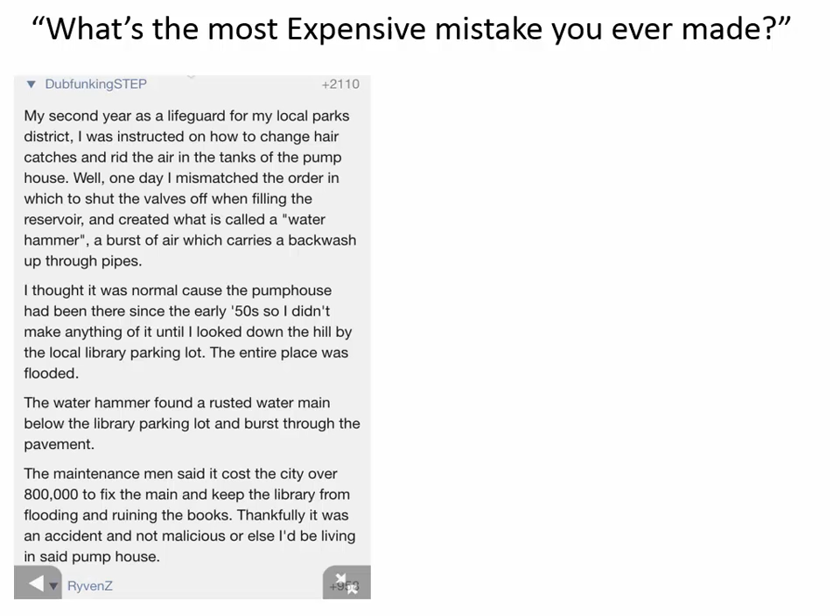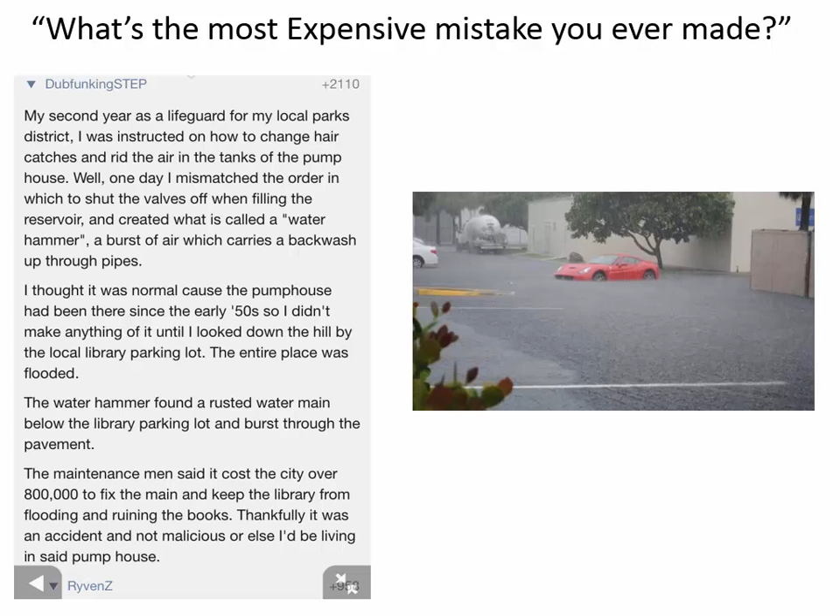So here's a picture of a really nice car that's flooded, just to drive home the point that water hammer can be expensive. Now, it's not always this enormous catastrophic loss. Sometimes water hammer can just be an annoying thing in people's house that they sort of scratch their head and wonder about what's going on. And that's what's going to be illustrated in these videos where water hammer is being observed in the home environment. So let's take a look at those, and then we'll move into the calculations that explain what water hammer is and how we can avoid it.

Almost seems like his pipes are haunted, right? What is all that banging? You notice it's as he was closing the valve that the trouble began. Let's take a look at another one.

It's a familiar sound. Nearly everyone has heard it in their own home when someone slams a faucet closed.

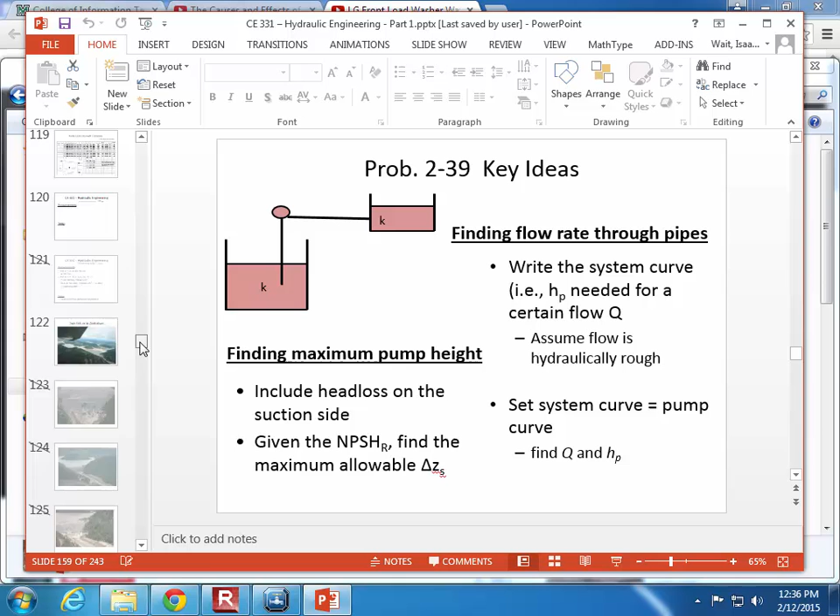Problem. I think it started the next one. All right. And it crashed PowerPoint in the process. All right, we need this one.

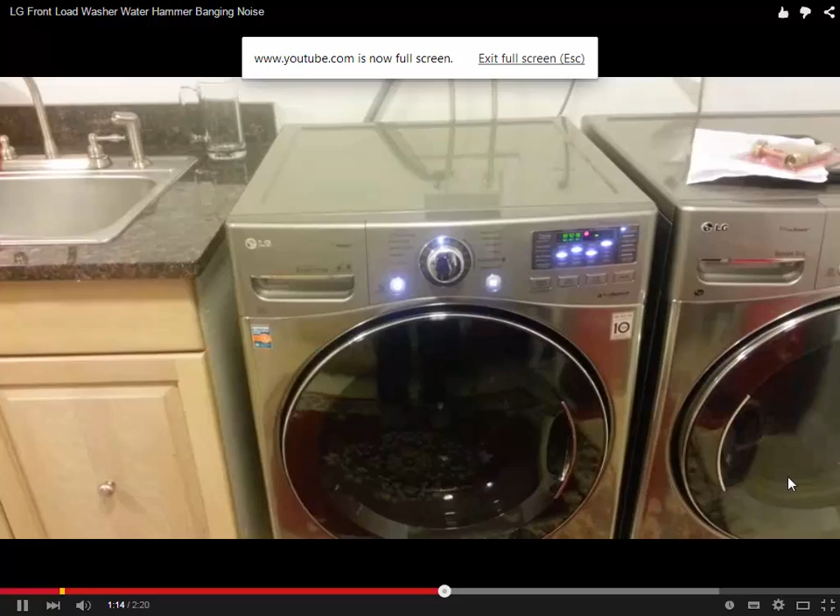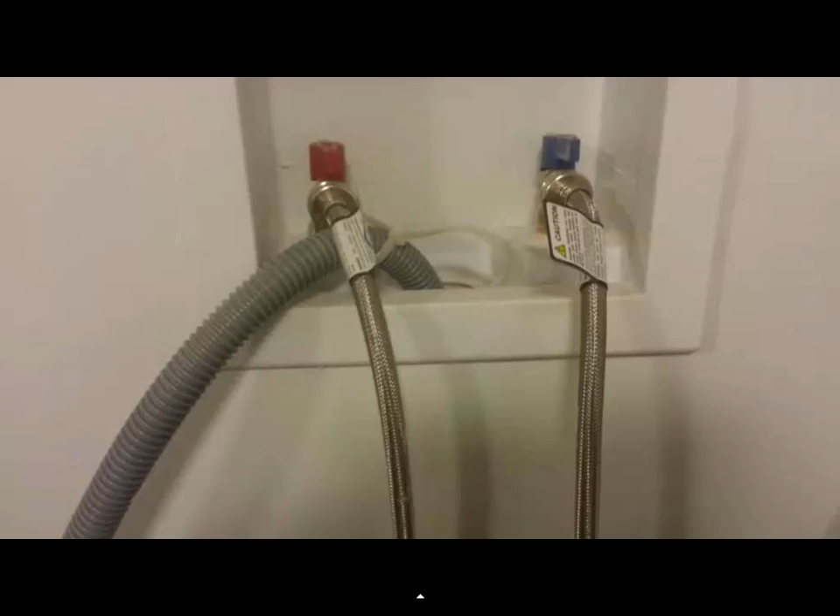Okay, watch the washing machine. Well, okay, you heard that noise come from the pipe. When we get closer, we're going to see the action over here. You see the whole pipe shake. That's from the cold water valve. And there's one solution to take care of this problem. Actually, you have two. You either lower down your house water pressure, or you have to get yourself one of this guy called mini water arrester.

All right, we'll talk about what that device does, but what you saw in the video is that something about the washing machine is causing the pipe to shake, and that's not so bad if it's a flexible pipe like is connected to the wall, but inside the wall where the pipes are fastened to the wall, over time that vibration can sort of shake the pipes loose off of the supports, and then the banging gets even louder. So what was happening in the washing machine is that there's a valve inside the washing machine that opens and closes very quickly, most likely a ball valve.

And we looked at valves in a previous class lecture, and we saw that a gate valve opens up very slowly. By contrast, a ball valve is just a sphere that has a hole through it. And when you turn it one direction, suddenly there's a path for the water to flow through.

So in the case of this washing machine, it has a valve that's opening very quickly so that a little bit of additional water can go into the wash, and then it's closing very quickly. And in fact, it's closing so quickly that a surge of pressure is sweeping through the pipes.

So let's step our way through the physical process that causes water hammer. And the easiest way to explain it is to envision a very large reservoir that is connected by a pipe, and at one end of the pipe is a valve. Pretty common to control the flow rate. So water is going at a steady state through the pipe towards the valve.

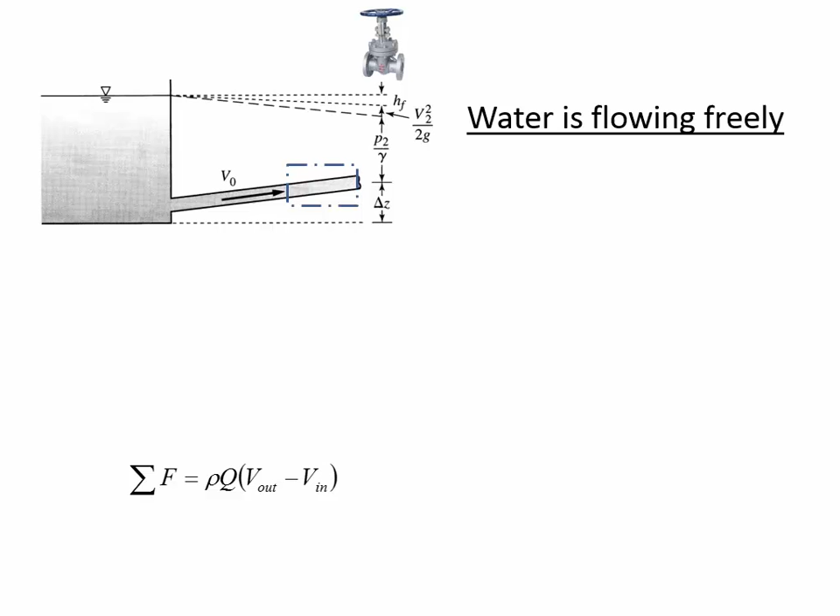So it's constant? Well, that's a good question. Actually, celerity depends on the environment that the shock wave is in. Just in free and open water, celerity is constant, assuming constant density. But when we confine water in a pipeline, then we have to calculate a modified celerity. And we'll do that in an example where we have a certain pipe that water is flowing through, and so the celerity changes because of that. That's a good question. Are there any other questions before we move on?

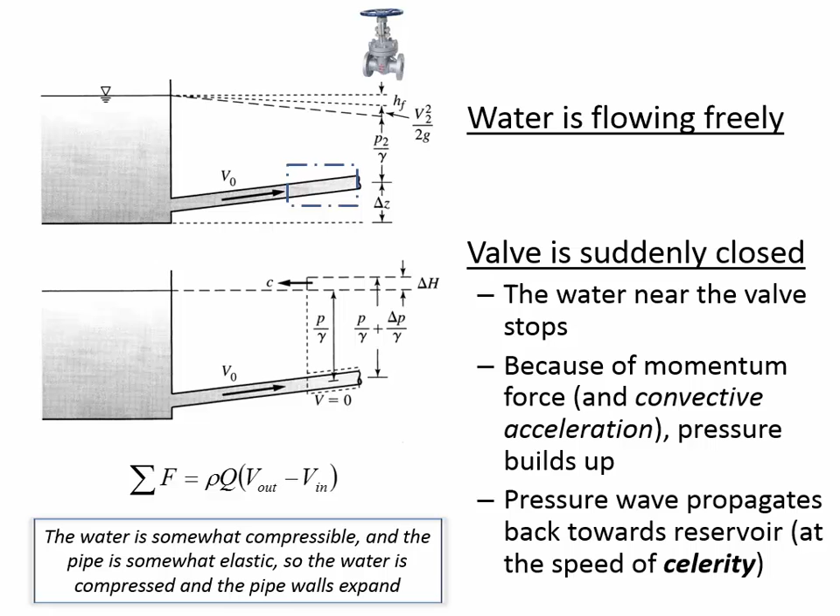Here in the box, I've reminded you that the compressibility of water is very low. It takes a lot of pressure to compress water, but in the case of a water hammer, we achieve so much pressure that the water is compressed a little bit and the pipe walls expand.

So now in this snapshot, the pressure wave has made its way all the way to the reservoir. And we're in a temporary equilibrium right now, actually. The pressure wave got to the reservoir, and at this instant in time, the pipe has expanded. So you see this little dashed line. That's representing the fact that the pipe is expanded just a little, not really a lot, but enough that there's more water inside the pipe than there used to be when the pipe wasn't expanded.

Think about if the pipe sort of swells just a bit, then it's going to have more volume that it can store. More water is going to be found in the pipe than when its diameter was a little bit smaller. And so actually the liquid height of the reservoir can decrease a little bit when the pipe is swelling. The water level goes down just ever so slightly on account of the additional volume that's stored inside the pipe.

And the pipe actually has a lot of energy in it because it's got potential energy of that pipe that has expanded. It's going to contract again. It's just a temporary thing that it's expanded because it has so much energy inside the pipe. That water is going to flow back towards the reservoir because it's expanded.

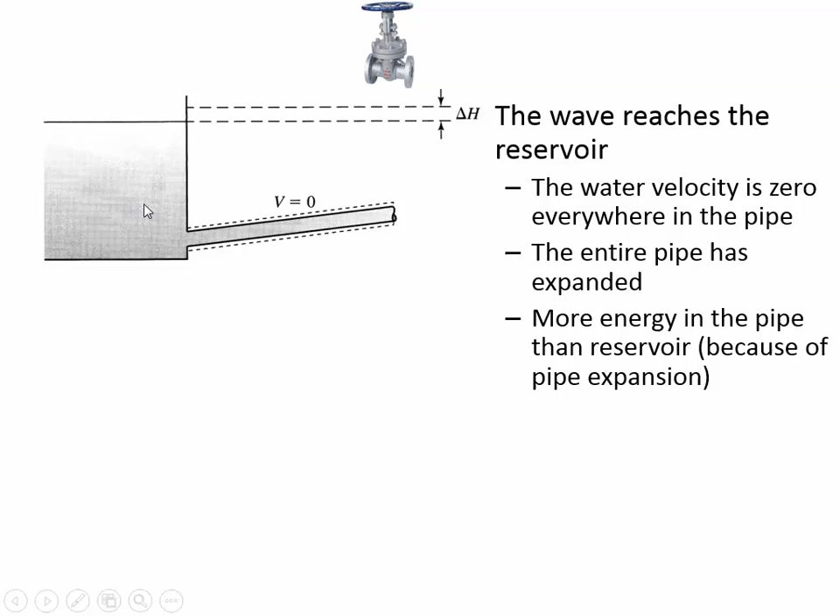And so now that's what's depicted here, is that the water that temporarily had flowed into the swelling pipe is now going back into the reservoir, and we have the shock wave returning back towards where the valve is. In our first stages, the shock wave was going towards the reservoir, and now it's making the return trip back towards the valve. So this wave can move back and forth between the valve and the reservoir several times before the energy dissipates enough that the water hammer is finished.

So any questions about why there's this banging that we hear? The frequency of the banging when the guy was closing his valve, that actually means something. There's a speed that the water is traveling, and how quickly you hear the banging indicates how far the shock wave is traveling before it finally reflects off something and is coming back.

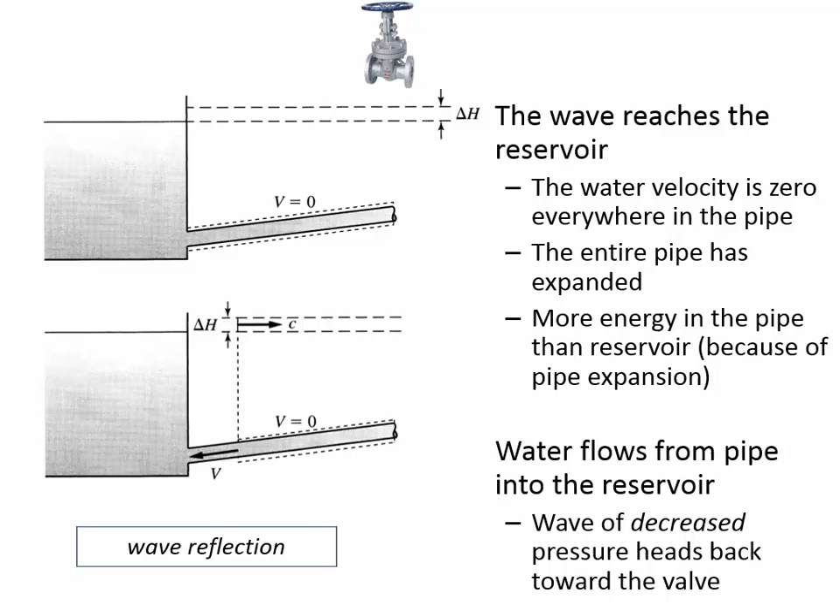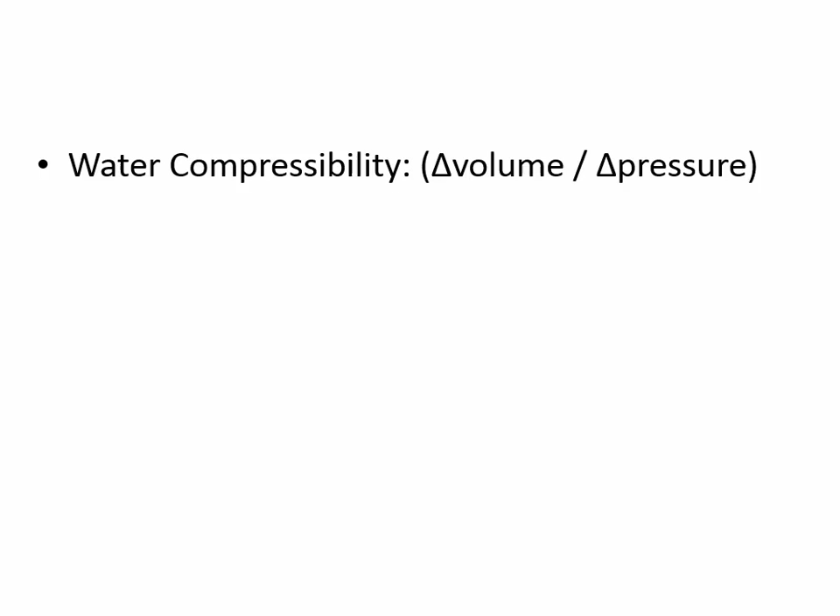So it's all about wave reflection. And water compressibility is an important part of calculating water hammer. And you know, we've talked before that it really takes a lot of pressure to compress water. And here is an illustration of that effect that I took from the website of London South Bank University. And it shows the temperature dependence of water compressibility.

And you'll notice the units here are inverse gigapascals. And the reason for that is it is a unit change in volume. So that would mean how many liters are compressed out of a certain volume originally, also measured in liters. And so the change in volume is unitless because it's a change in volume divided by the original volume, divided by pressure. And so what we're left with is these units of inverse pressure.

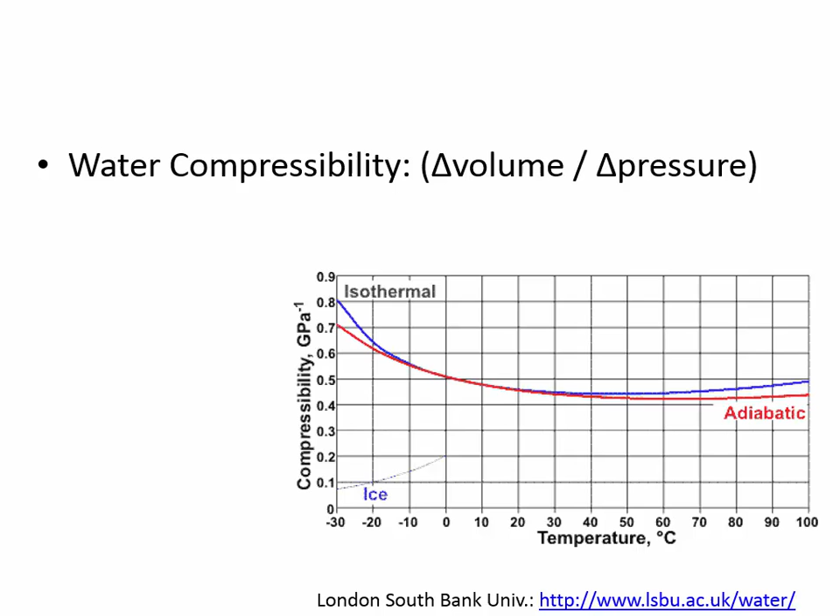And gigapascals is way, way far beyond the water pressures that we're usually working in. In a typical municipal environment, remember, 500 kilopascals would sort of be like a baseline water pressure for inside your house, 500 kPa. And so beyond that is MPa, megapascals, and then 1,000 times beyond that is gigapascals. So it really takes a high pressure in order to change the volume of water.

And when you do apply that pressure, why is it changing volume? It actually has to do a little bit with not the molecule itself, but the association that the molecule has with adjacent water molecules. And so it comes into these sort of associations with adjacent water molecules that very slightly have different volume requirements. And these different diagrams give you an idea of some of the different shapes and arrangements that water can take on as it's being compressed.

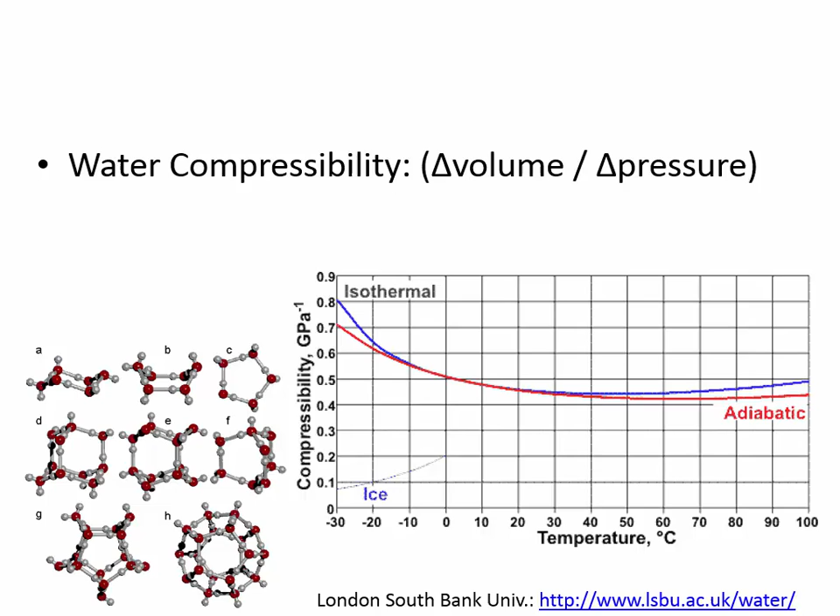So this was compressibility. The inverse of compressibility is actually what we'll put into our equations. So sometimes compressibility makes more sense to students because we're thinking about change in volume relative to how much pressure is applied. But it's actually the bulk modulus of elasticity that goes into our formulas for celerity and the amount of the pressure that accumulates. And bulk modulus of elasticity, you'll see, has, instead of volume divided by pressure, pressure divided by a unit change in volume. All right?

So it has a negative sign here, which tells us that an increase in pressure is going to decrease the volume that is occupied by a certain amount of water. So that's why we have a negative value for the formula for bulk modulus of elasticity. And you may remember bulk modulus from your materials classes, because it's a physical property that can be applied to solids as well as liquids like water.

Here's a table that's taken from the text. It shows that the bulk modulus changes according to the pressure of the environment that the water is in, but also according to temperature. And so when we do problems like this, if we really want a high degree of precision, we have to specify what's the original pressure that the water is experiencing when the water hammer begins, and then also know the temperature, whether it's room temperature or something else. So here's the bulk modulus in SI units, and here they are in traditional units.

Of course, traditional units are always a little tricky, and even more so when we're going to be working in examples with water hammer, because we have the bulk modulus given in terms of pounds per square inch. But when we do our calculations, we're going to need to remember to change pounds per square inch into pounds per square foot. So what's the conversion from pounds per square inch to pounds per square foot?

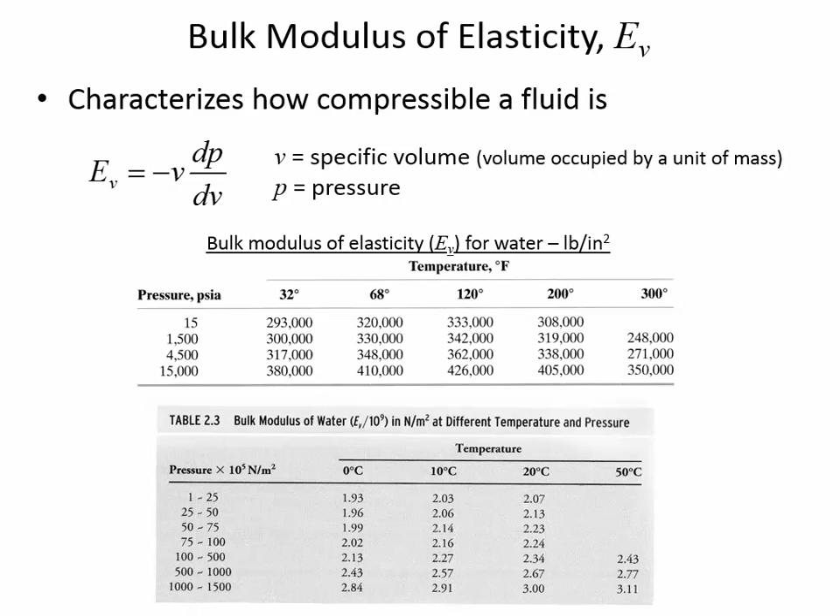144, yeah, because there's 12 inches in a foot, and it's 12 inches on each side. So if we have 1 pound per square inch, then that would be 144 pounds per square foot. So just as a hint, when we get to the example, we'll work the example in traditional units, and you'll need to remember that conversion factor.

All right, so we talked about celerity, and it's not celery, but every time I say celerity, I think of celery. It means basically the velocity of a pressure wave. And theoretically, out in the open water, we can calculate how quickly that pressure wave is moving just by considering the bulk modulus of elasticity and the density of the liquid.

All right, so bulk modulus, of course, depends on the pressure and the temperature. And the density of the water also depends on the temperature of the liquid. But a typical open environment celerity would be 4720 feet per second. So it's really moving quickly, much faster than a shock wave moves through air.

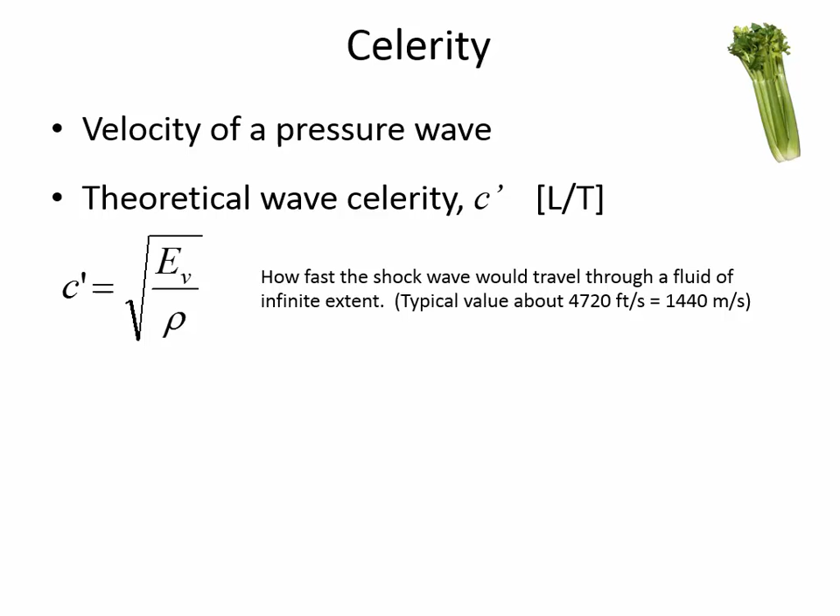But in a confined pipe, we have a different equation for the speed that a shock wave moves through water. And it accounts for the diameter of the pipe, and the diameter is the inside diameter that we're talking about, because we know a pipe has thickness, and the pipe thickness is accounted for here. The thicker the pipe is, obviously, the less it's going to flex. And so we have to remember that it was the pipe expanding a little bit that caused an accumulation of energy inside of the pipe.

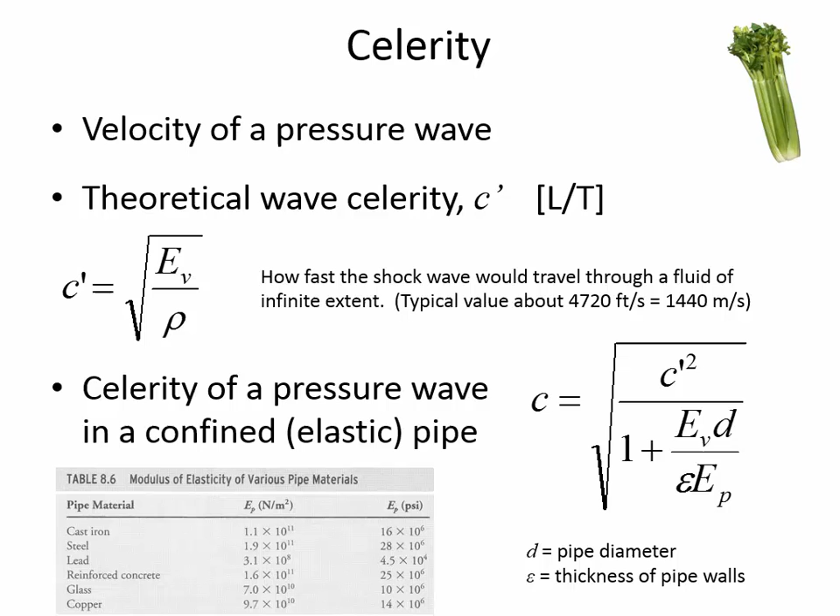And so we have to know, how is the pipe going to behave when there's a pressure accumulation inside of it? And so the pipe's behavior is described by its thickness and then the bulk modulus of the material itself. The bulk modulus of the material says, how well is this particular pipe going to expand when there's an increase in pressure? So here the celerity in the confined pipe takes the water characteristics and the pipe characteristics into account. And that's how we find how quickly the shock wave is moving through the pipe.

And so if we know the speed that shock wave is moving through the pipe, and we know the pipe's length, then we can find the travel time for some pipe length. Now, this formula that I've given you, though, is just the travel time. It's a one-way travel time. It's going to turn out that operationally, what we need to make sure of is close the valve slow enough that the shock wave can go from the valve to the reservoir and back before the valve is closed. That's what we can do to prevent the library from flooding and an $800,000 repair to the city's water main.

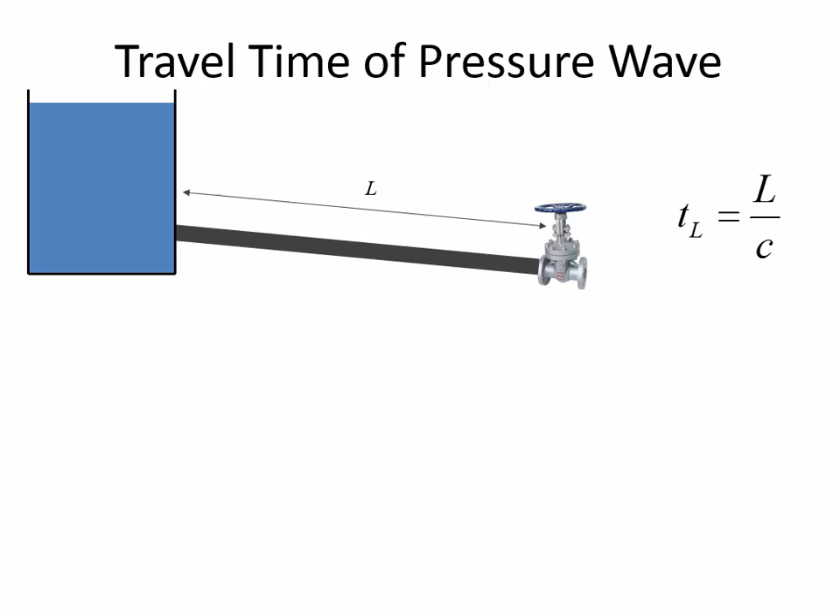We have to make sure that we close the pipe nice and slow, because if you close the pipe slow, the pressure doesn't accumulate, because the deceleration is so slow that there's not a pressure accumulation. So that's really the key to all of this, is rather than just snapping that faucet closed really quickly, you close it slowly and the pipes aren't going to vibrate. So the travel time that we have to consider is the round-trip travel time.

And once we know the velocity that the water is traveling initially and the speed that it's traveling, you can actually find out how much the pressure is going to increase during the peak of that surge. And here's the formula for that. Now, as I've mentioned, the worst case scenario, you're going to get the most pressure accumulation and the worst water hammer if you close the valve so quickly that it's totally closed before the shock wave makes it to the reservoir and back. So that's the worst case scenario, and that's what's going to give you the maximum pressure increase. And if you close the valve slower than the travel time takes to go there and back, then you won't see that delta P. You'll get a pressure less than that delta P.

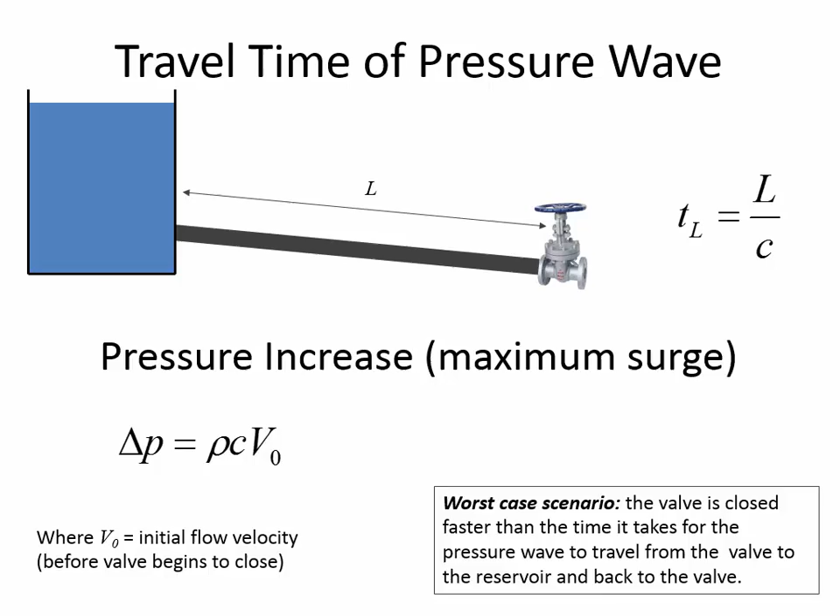All right, so here's the example where you're going to get a chance to try these equations out. We have a system that's described here, a 2,000-foot long pipe. The 4-inch steel pipe that we're talking about here, that's the inside diameter. And so that's what you can use to get the cross-sectional area. And you're going to need the cross-sectional area to calculate the initial flow velocity. Here we've got the characteristics of the pipe, the thickness of it, and the bulk modulus of the pipe material, since this is based on steel.

Here's the flow rate, 0.6 cubic feet per second, and then here are the water characteristics. We have the bulk modulus of the water and the density of the water. And in traditional units, the density is a bit weird, 1.94 slugs per cubic foot. And I remind you down here at the bottom that if you have one slug being accelerated 1 foot per second squared, then it takes 1 pound of force to do that. So you'll need this conversion factor at the very end. So I'd like you to go through these equations and first of all, calculate the pressure increase if the valve is closed instantaneously.

And by instantaneously, what we really mean is it's closed so quickly that the pressure wave, it's closed by the time the pressure wave makes it back on its round trip. And then after you've found that pressure increase, let's try and avoid the water hammer from occurring and calculate the minimum amount of time that should be taken to close the valve.

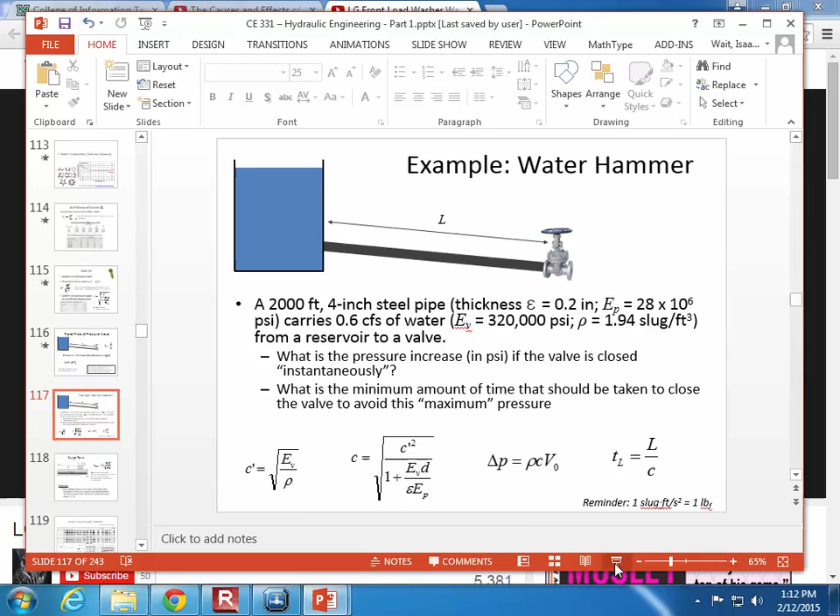I didn't necessarily need to make it my first calculation, but I found the initial flow velocity at the beginning just because I knew later on I was going to require it. So we've got the flow rate divided by the area to get the initial velocity. And you know, 6.87 feet per second, that's a typical speed of water flowing through an underground pipe network. That's not unusually high.

And 2,000 feet isn't an unusually long stretch of pipe. Throughout the area here, there are water tanks all over in the hills pressurizing water in different neighborhoods, and it would be very common for there to be 2,000 feet from a tank to a customer. So we're not dealing with really crazy values here. This is a pretty accurate example.

So we can find the velocity of the pressure wave moving through open water for the temperature conditions that we're describing. Using this bulk modulus, 4874 feet per second. But when we find out how quickly the pressure wave is moving through a pipe, we see that the velocity is reduced slightly.

And that's because as the water is moving through the pipe, it's also causing it to expand. So you could think of it conceptually as it's doing work in two ways. The pressure wave is moving forward, but it's also causing the pipe to expand. And so it's that expansion that slows it down a bit. And that's why we were taking into account the diameter of the pipe and the bulk modulus of the pipe material.

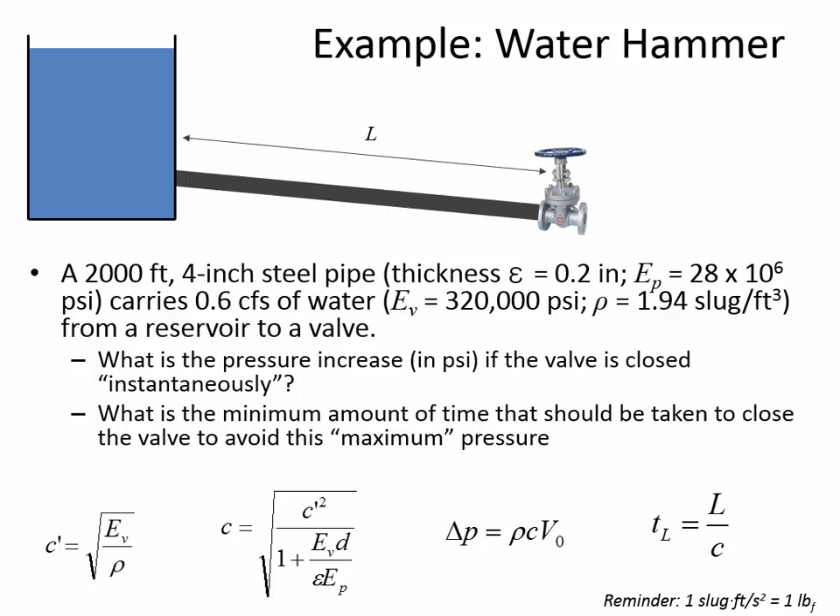So who's going to be paranoid as they turn off the faucet tonight? Try and get the water hammer. Yeah, definitely. Especially if you live in the dorms and it doesn't matter, right?

All right. So, surge tank. This is another one of the options to prevent the damage that can occur. And I'll go through this calculation fairly quickly so that we'll have some time left over to look at the example from last time that we were doing with Excel.

And we can size a surge tank, and you'll do this in the homework. You'll size the surge tank depending on the cross-sectional area of the pipe, the length between the valve and the reservoir, and then it also takes into account the cross-sectional area of the tank. So the bigger the tank you've got, obviously the lower the increase in water depth is going to be.

There's just a certain volume of water that's either going to be trapped in the pipe when the pipe starts to expand, or we can have that volume of water that would have flowed into the pipe during the expansion of the pipe. We'd much rather just have it in the surge tank. So we can either have a tall surge tank or a wide surge tank, but there's just a certain volume of water that has to be accommodated inside of the surge tank.

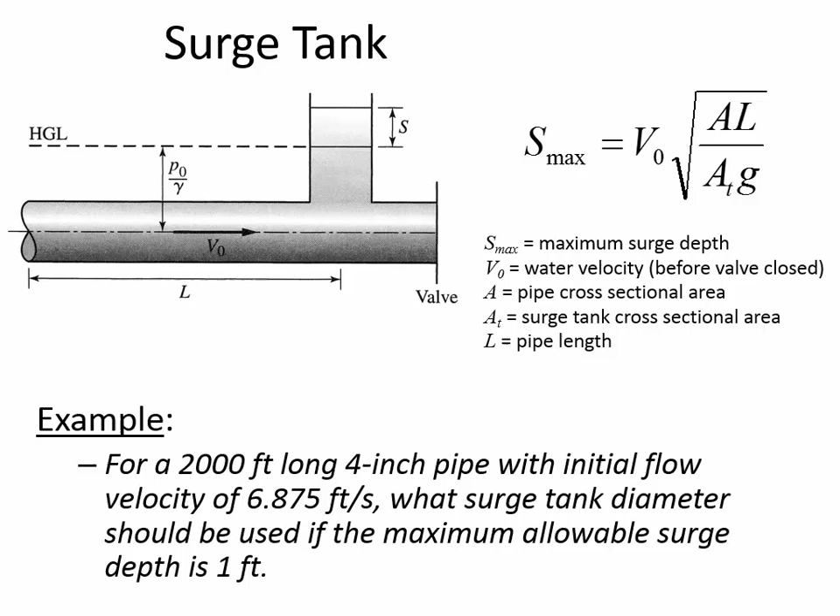All right. Let's revisit this Hardy Cross example that we were working last time. How many of you got a successful spreadsheet that works? Okay, maybe a third of the class. How many of you worked on it, but there's an error somewhere and you don't quite know where yet? All right, and so I guess the balance is people who didn't work on it, right? But you will, because you've got the homework coming up.

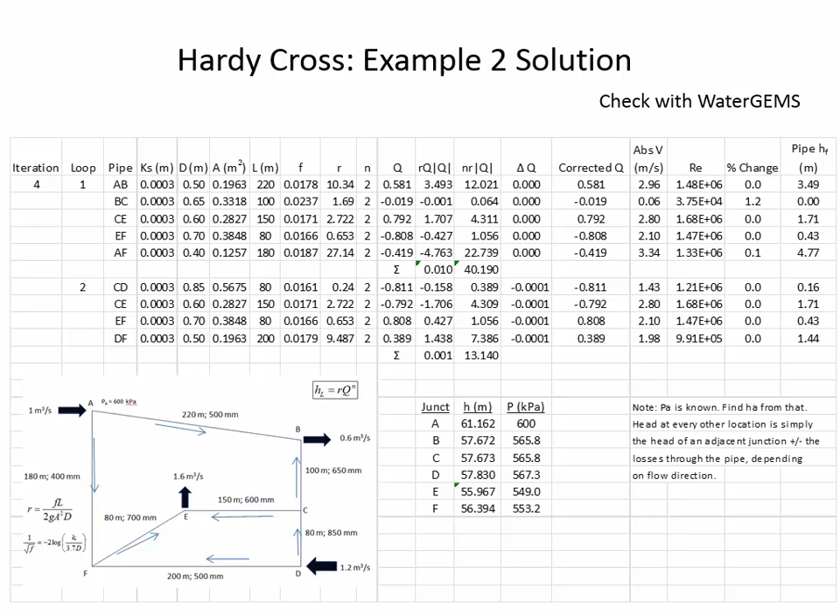All right, you had some exposure to WaterGEMS when we were in fluid mechanics last semester, and you're going to have a lot more this semester. I'll send a reminder email with all of the server details and the school code. So I'll send you the information you need to be able to download the software onto your own laptop.

But what I'd like to do today is just set up this same problem in WaterGEMS and see how well the flow information that we got with our spreadsheet compares to a network that we could put together with WaterGEMS. We've got 15 minutes and I think that'll be plenty of time. So this will be a good refresher of how to use WaterGEMS.

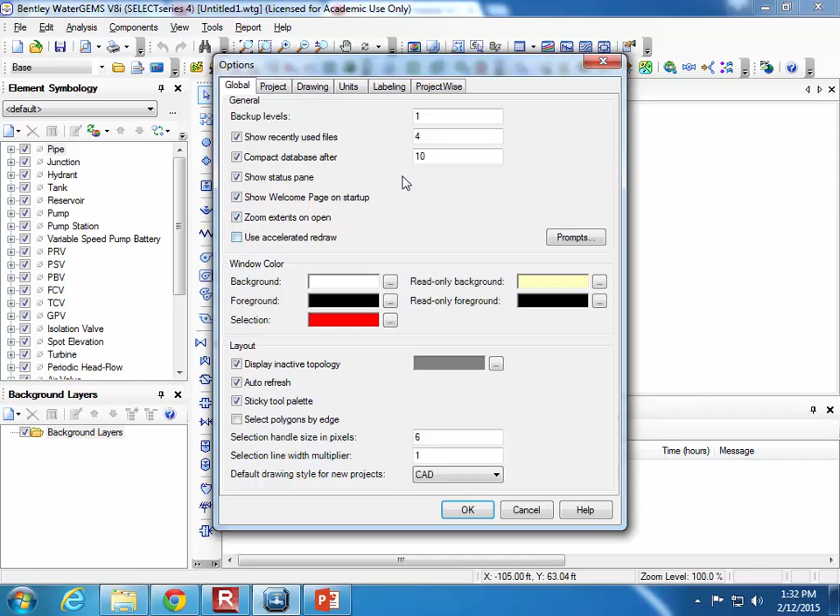We've got to start a new project, and the first thing we're going to want to check is what are the units of the project. We need this to be in SI units because all the given information like the pipe lengths and pipe diameters are in SI. So I go into Tools and check the options to make sure that the units are not in customary but in SI, and click OK. Now that I've changed it, I need to close it and start a new project, because the previous project units would somehow stay, and check units SI. Okay, so we're good there.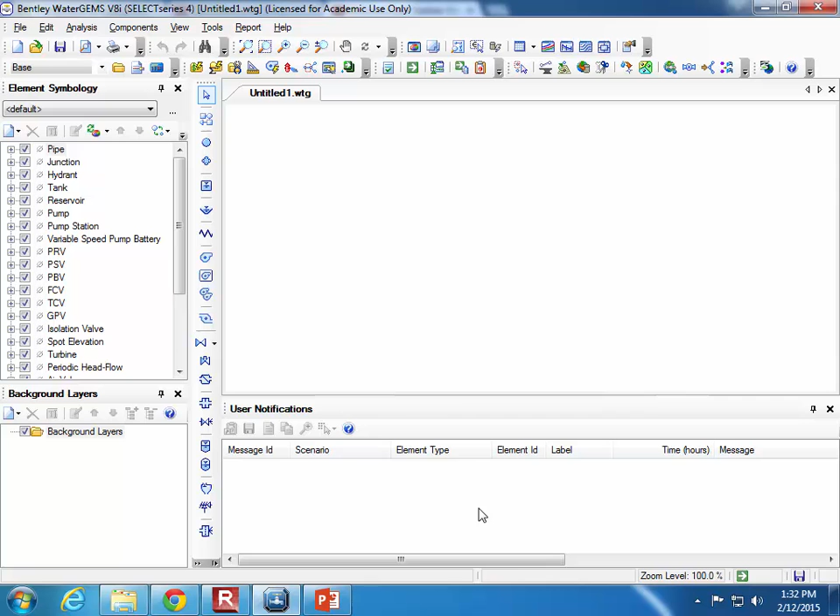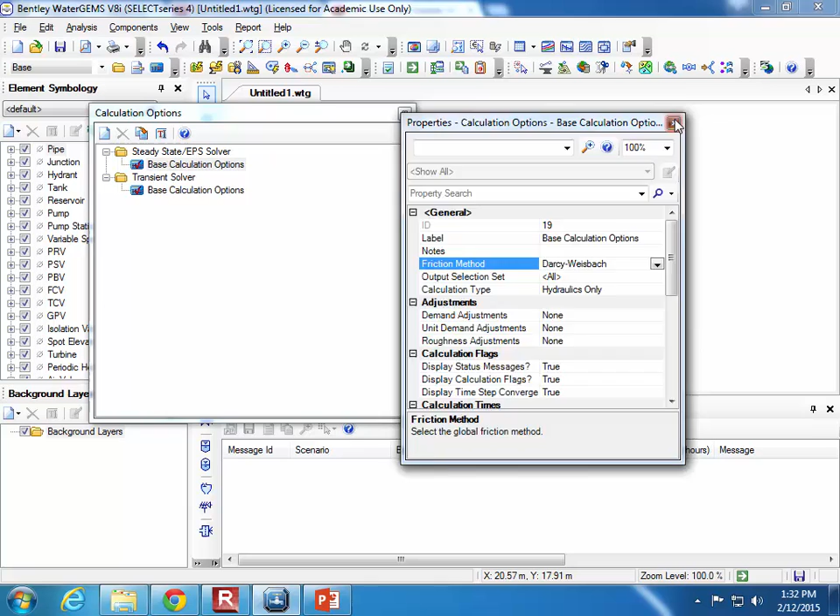And the other of the two preliminary things you always need to remember to do is go into the calculation options and make sure that it's set to the Darcy-Weisbach equation instead of Hazen-Williams. Remember, the Darcy-Weisbach equation is more accurate than Hazen-Williams. And we don't care if it's going to take a couple of extra iterations on the computer because we've got the time. So we've switched it over, and it's always a good habit to save your work. So let me create a temporary folder on the computer and save this. Okay, so I'm going to call this our Hazen-Williams check, and I've saved it.

I'd like to have an image in the background that I can draw on top of. It just makes it a little easier sometimes. And in the project, you'll have the same thing. And I don't think that I taught you how to import an image when we were doing the preliminary testing of this program in fluid mechanics. And so down here in background layers, it's pretty easy. You just click New File, and then it gives you the chance to browse to whatever image you'd like to add. And I have this image that I created that is the same thing that we had from here. It's this same diagram that came from

PowerPoint. Now, the way that I've imported it is not to scale. When you do the project, I'll give you a scaled image so that 1 pixel equals 1 meter. But right now, that's not the case, and so I'm going to have to be sure and go in and do user-defined lengths when I'm setting up the pipe characteristics.

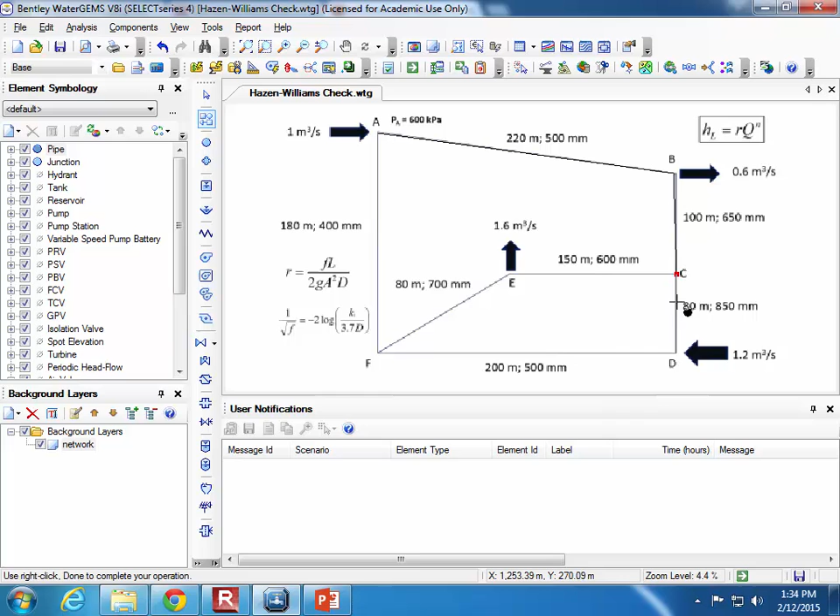Okay, so now that this image is in the background, I'm just going to draw right on top of it. And so here is the way that you draw a pipe. I'm going to put a junction at A, junction at F. Actually, I'm going to go in order. A, B, C, D. Now, I can't do E next, but F, E. I need to make sure that C is connected, and then I think I haven't yet connected A and F.

Okay, now let me just make sure that the lines are where they need to be. I can switch that on and off. My symbols are a bit small, and so I'm going to go in here to the options and change the symbol size, let's see, drawing, yeah. Symbol size multiplier to 5, and now you can see those little dots are there to signify a junction.

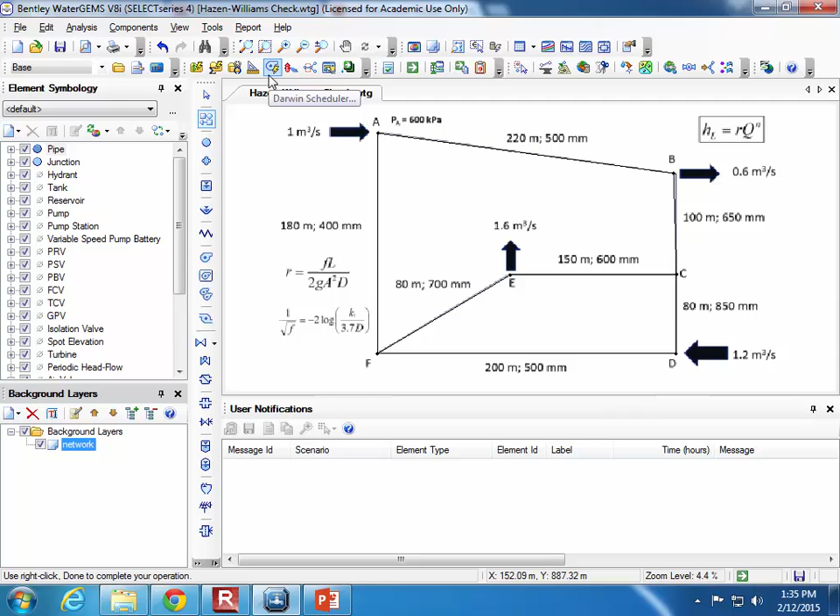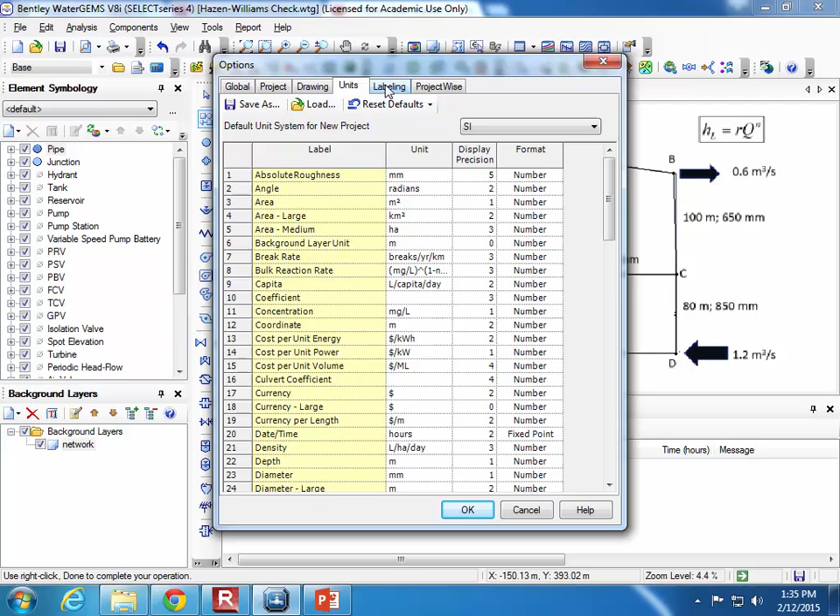Okay, so now what we have to do is make sure that the characteristics of the pipe are correct. I'm going to enter in the correct pipe lengths and diameters, but it'll actually make things easier if I rename the junctions. So I'm going to make my text height multiplier also 5. And so right now, the junctions, that's too small. Let me do 10 times bigger, and maybe we'll be able to see things here. All right. So now we can see the labels of things.

It's called J1, J2, J3. I just want to give it the same names that it had in this example, how we had A, B, C, and so on. So when I go into the pipe table, I'm going to change the labels so that we've got A, B, oh, I'm sorry, not the pipe, the junction. Yeah, the junction table. All right.

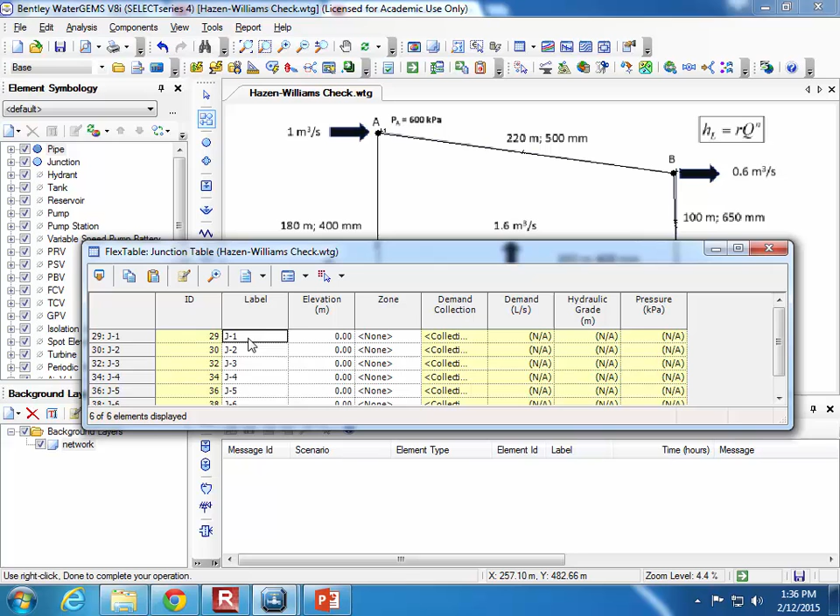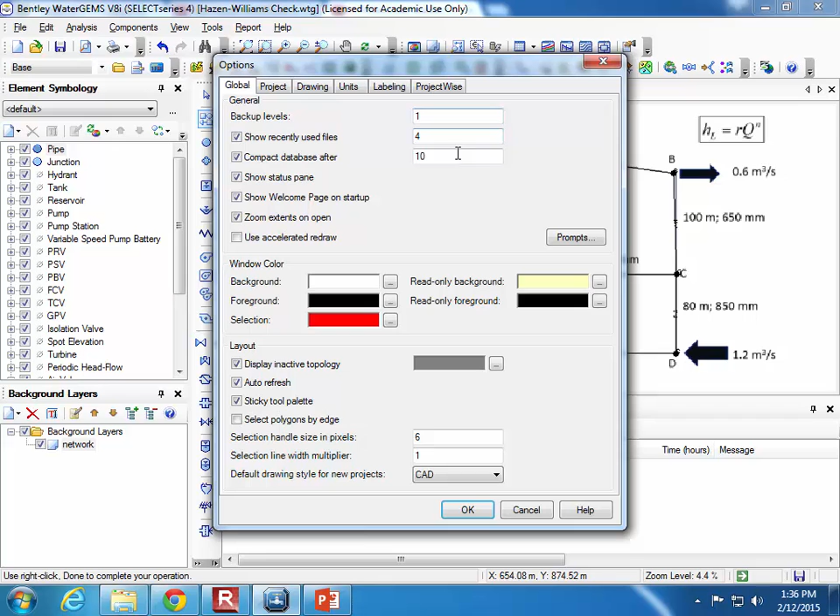A, B, C. I got to make sure I'm doing the right ones. D. Now, junction 5 is this one. I think that's F. Junction 6 was E. All right. So they should all be labeled now. I still would like those to be a bit bigger, so I'm going to change this up to 15 so the text size is larger. It's starting to get big enough.

All right, so now I've labeled the junctions. It'll be a little bit easier when I get into the pipe table to know which pipe I'm working with. So if the start node is A and the stop node is B, then this pipe is going to be AB. I'm naming the pipes just what the start and stop node are. BC, CD, DF, EF, CE, and AF. Okay?

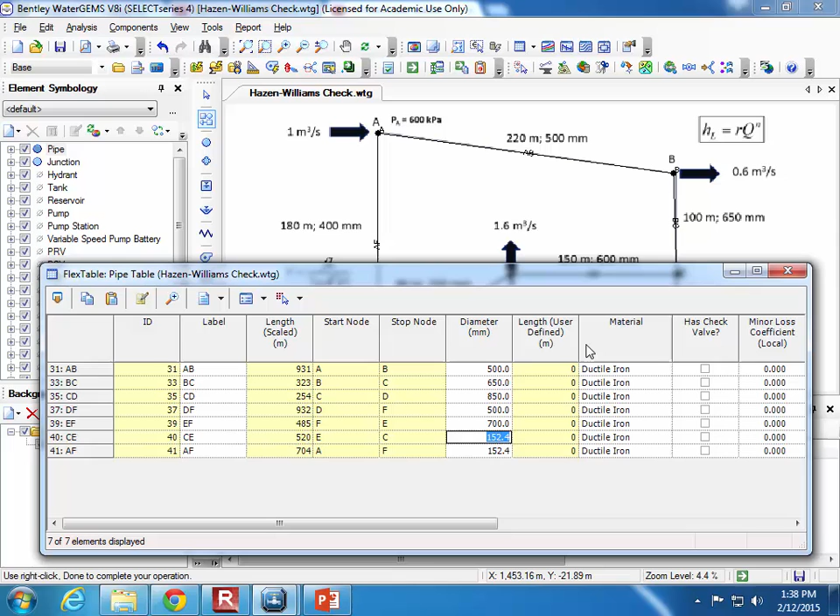So they have the correct names now, and I need to make sure that the diameters and the lengths are correct. And so AB had a diameter of 500, BC, and by the way, as I'm putting these characteristics in, follow along in the spreadsheet to make sure I don't key in incorrect values for the diameters. 650 is the diameter, 850, DF 500, EF is 700, CE 600, and AF is 400.

Okay, we also need to make sure that the lengths are correct, and you'll notice that the scaled lengths here don't match the actual lengths because I didn't import the image so that 1 pixel was equal to 1 meter, and so I want it to be user-defined length. So I'm going to global edit so that we have yes for the user-defined length. Now that allows me to enter in these user-defined lengths. So AB has a length of 220 meters, BC is 100 meters, CD 80, and so on, DF. EC 150, and AF 180.

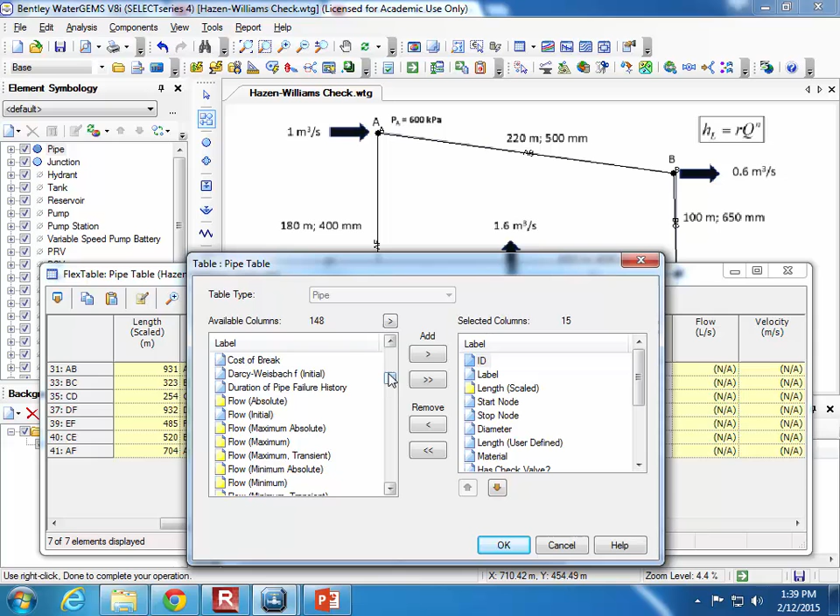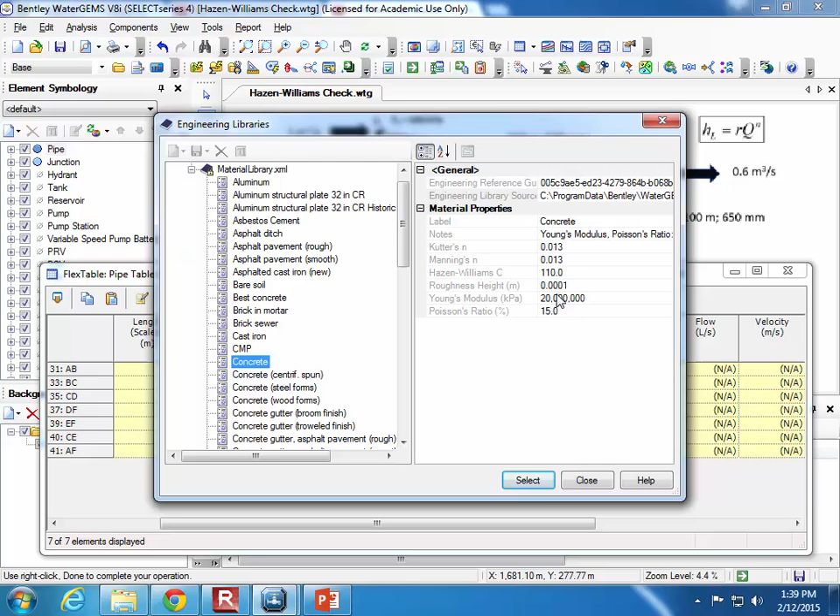Okay, the only other thing I want to double check is the material type, because in the example it said all pipes have a Ks of 0.3 millimeters. And so I can turn on the Darcy-Weisbach. I'm sorry, not the Darcy-Weisbach, let's see. If I go into the material properties, we can check to see what it's assuming. If I use, for example, concrete pipe, here is the roughness height of concrete pipe, and we need a Ks of 0.3 millimeters. Right now this is 0.1 millimeters for concrete pipe. But if we global edit to cast iron, that will give us the roughness that we need for each of the pipes.

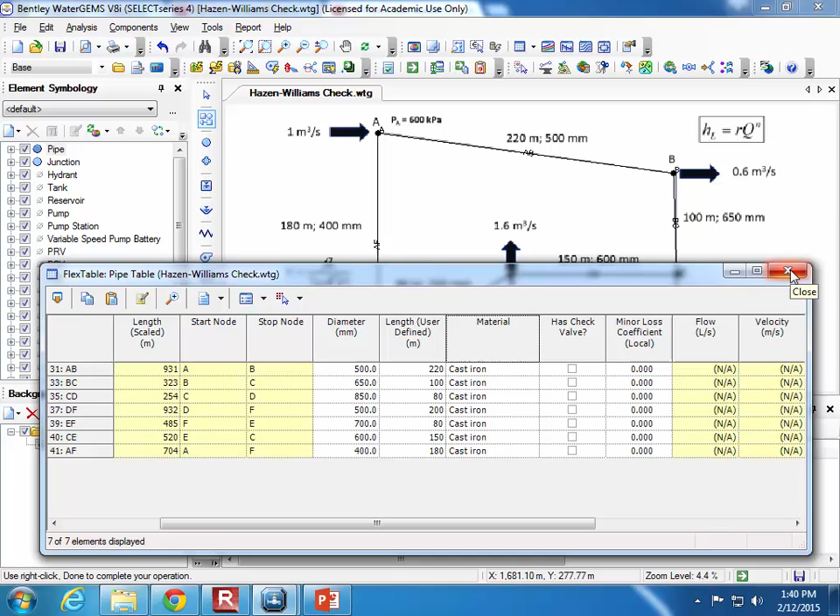All right. How are we going to make pressure at A 600 kilopascals? How do you specify a pressure? Any ideas? Do you remember what we did?

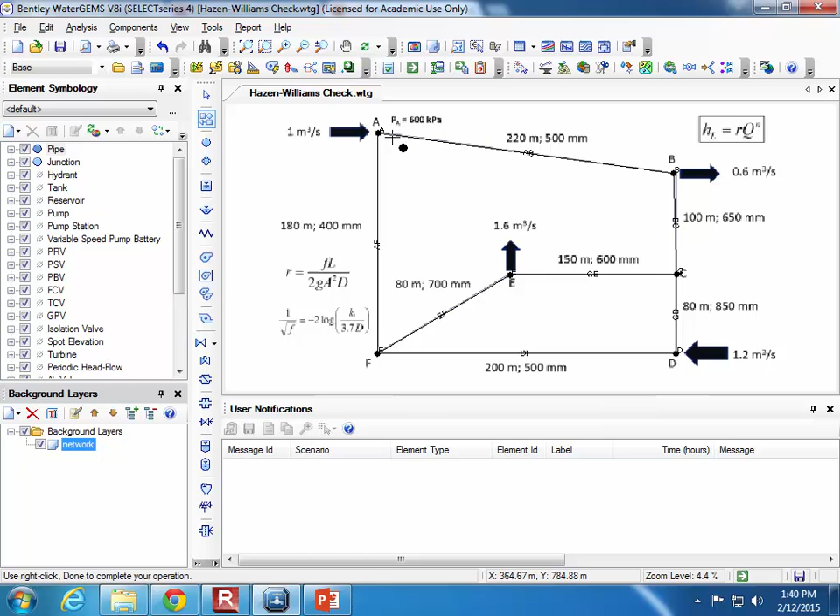Well, it's not in the junction table. We were putting down something in fluid mechanics to cause pressure. Do you remember we had pipes connected to something? It was a reservoir, right. If we have a reservoir with a certain water height, then that pressurizes that junction. So we need to actually put in two reservoirs.

I'm going to put in a reservoir here because I've got water flowing in from the reservoir. And I'm going to put in a reservoir here because water is flowing in. It has to come from somewhere. And the reservoir elevations that I'm going to specify are, we're double checking this Excel solution, the heads that it's picked here. So at A, I'm going to say the water elevation is 61.16. And at D, I'm going to give it an elevation of 57.83.

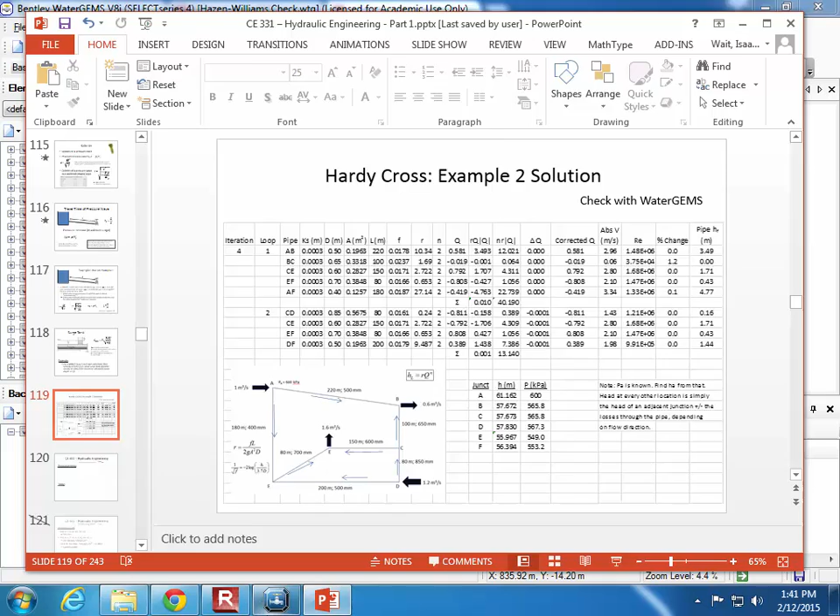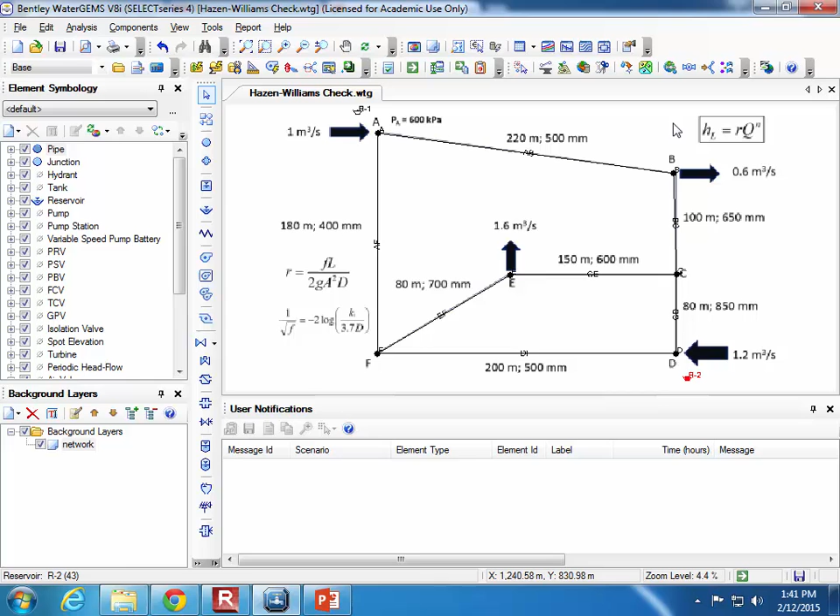Okay, so let me just double click on that reservoir. And here's the elevation of the reservoir. I want it to be at 61.16 for that one. And this reservoir should be at 57.83. I need to connect the reservoir to the networks also. So I'm doing that. And since the reservoirs aren't actually in our original solution, we just put these in to cause the pressure and to provide some place for the flow to come from.

I want to make sure that these pipes are very big so that there's no energy loss through the pipe. So I'm going to make the pipe unusually big from these imaginary reservoirs that only exist for us to force the pressure condition that we want to check. So I'm going to open up the pipe table. And for these two new pipes, I'm going to make the diameter 2,000 millimeters, just so that there's no question about too much energy loss through those pipes. And you'll do the same thing in the project. You're going to want to make sure that you have really big pipes when it's connected to a reservoir.

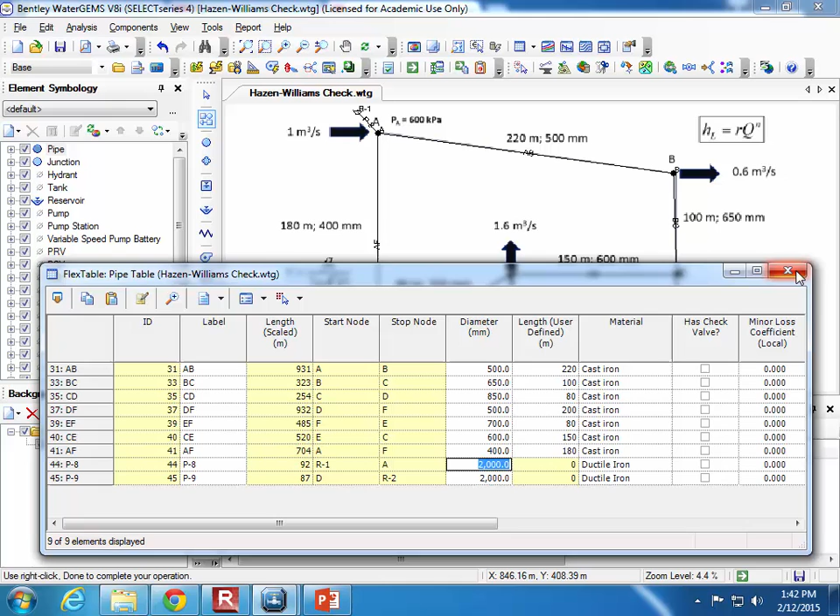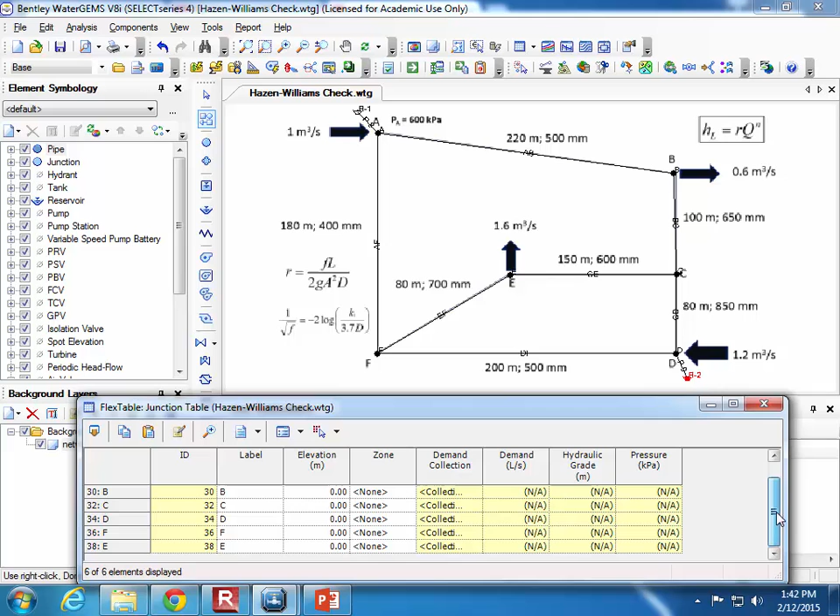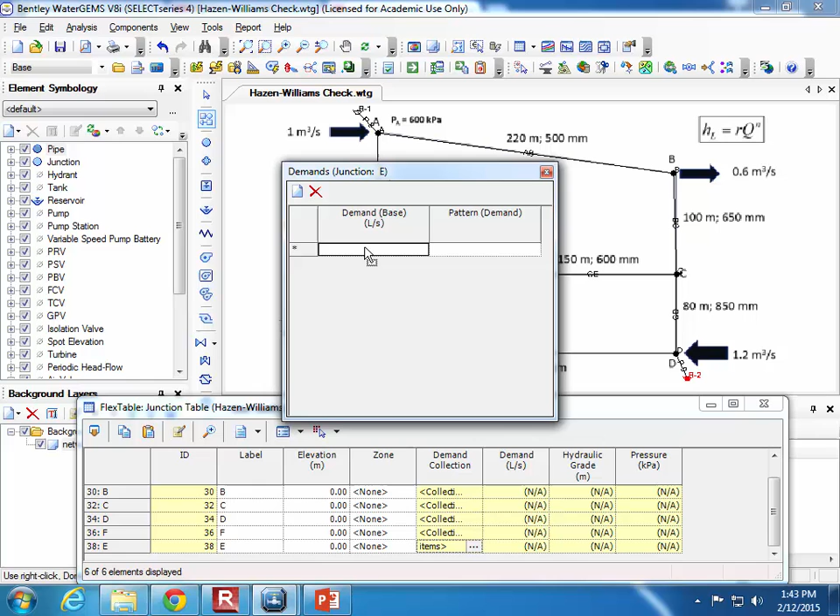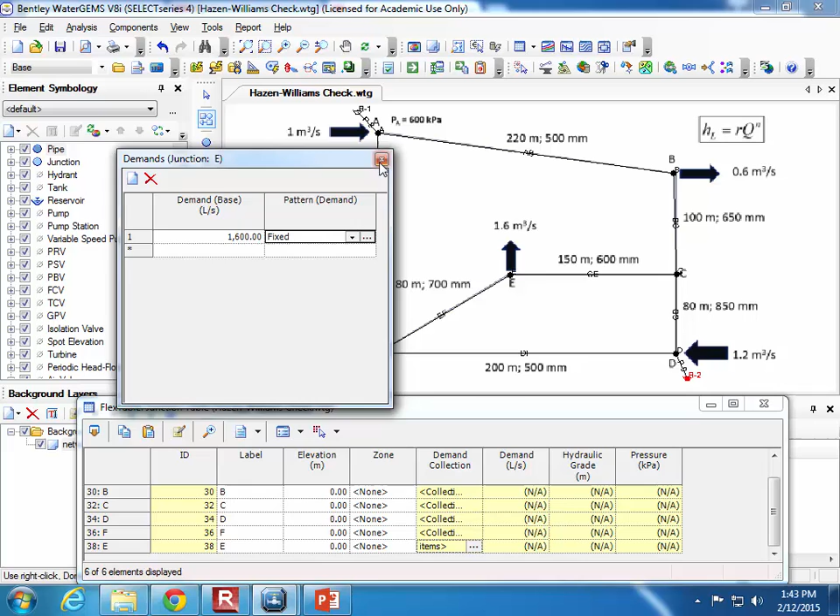Let me save my work. The only other thing I need to do now is I need to specify the demands. And so water's coming out at E and B. I go back to the junction table, and at E, I want there to be a demand collection. That's how we specify the flow rate. So E should have a demand collection of, how much is going out there at E? Okay, so 1,600 liters per second. And then at B, there should be 600 liters per second. Okay, and I can close that.

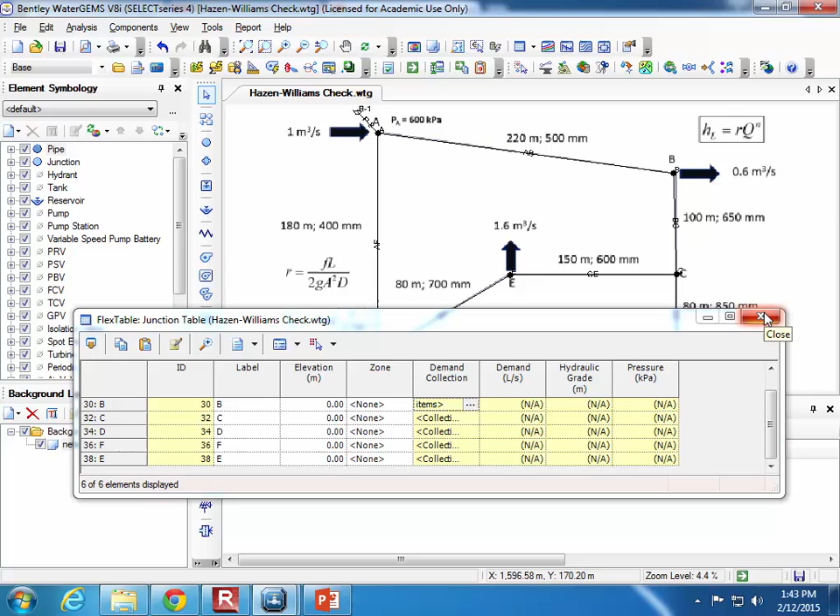Now I think the system has everything it needs to know in order to calculate. It knows the pipe characteristics like the length, the roughness, and the diameter. It knows the pressure at the control point. And the system assumed 0 elevation for everything. So when I was putting in the reservoir elevation, that was above sea level, and the junctions are assumed to be at sea level, since the default elevation is 0.

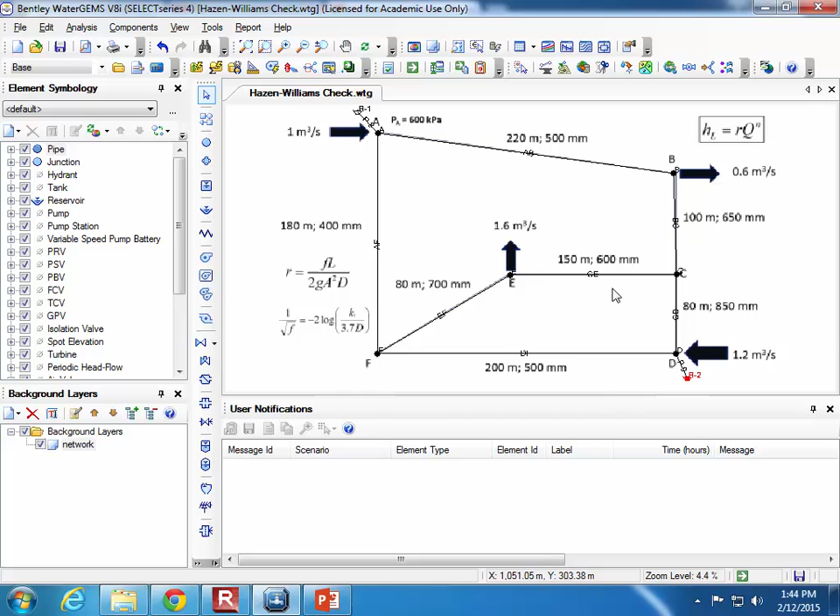So when I calculate it, oh, great, the license is expired. Luckily, I have this on my office computer. So let me just remote into my office computer, because I know that the license isn't expired there. And I'll show you what I came up with. We've got 1 minute left. That's all it'll take.

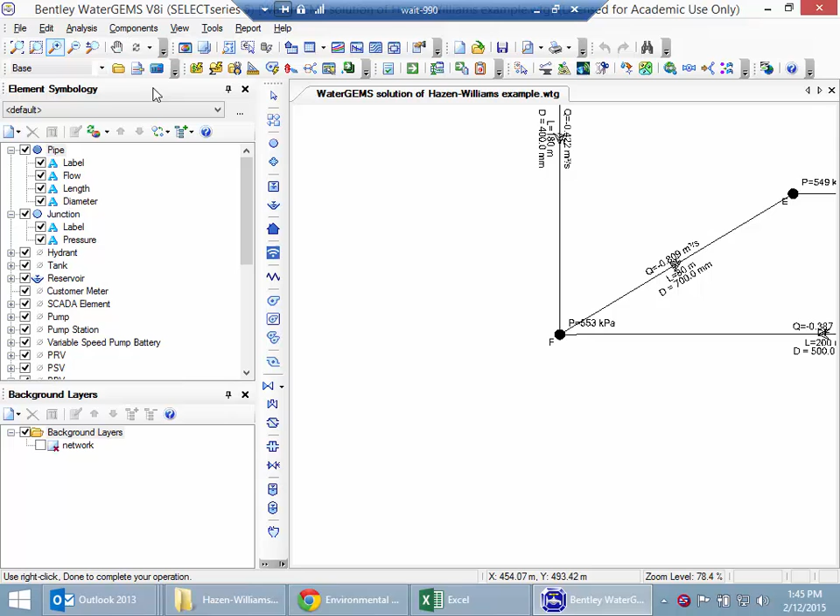When I was working on this earlier, I actually did the annotations as well. So how good is the guess that we had with Excel? It turns out to be pretty good. Let's pick a couple of junctions. Here at F, our Excel solution said it should be 553.2 kPa, and at F, that's not F, here's F, it turns out to be 553. Let me zoom in. So 553. The flow rates are all good. It all matches except for the one pipe where the flow rate is pretty low. And those are always going to be subject to a lot of error because the flow rate is low.

So I'll post a copy of this file in MU Online if you want to load it up and just make sure that you're getting Bentley to work okay. Which pipe had the really low? The really low flow pipe is BC. Was that random or for a specific reason? No, it's just because there was more resistance there than the other routes, and so, in equilibrium, less water's flowing through it. All right, so I'll post this in case you want to open up WaterGEMS.